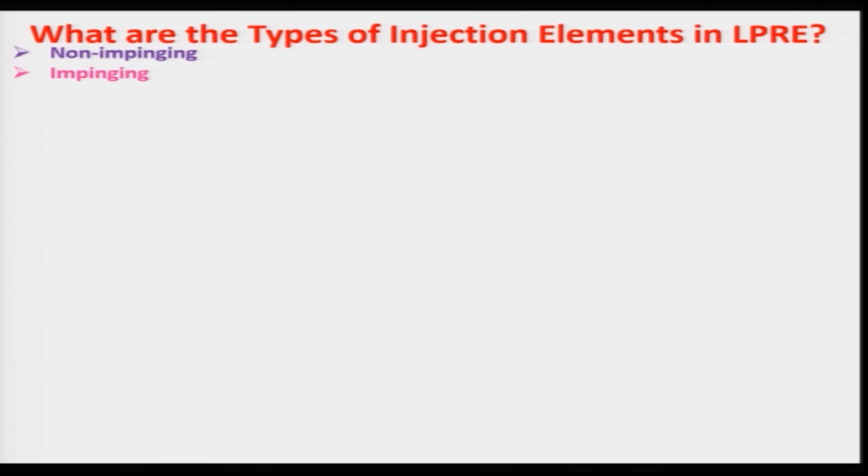Today we will be looking at various kinds of atomizers that have been developed for liquid propellant rocket engines. As I told earlier, they are basically divided into 2 categories: one is the non-impinging atomizer, the other is the impinging atomizer. Several types of atomizer have been developed and used by various researchers, but we will be discussing only some representative atomizers under these 2 categories. Let us look at some of them.

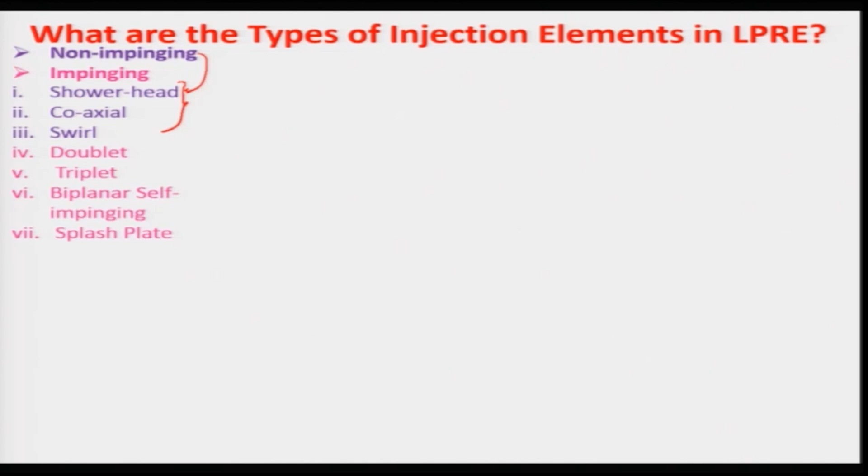The shower head, coaxial and swirl are non-impinging atomizers, and doublet, triplet, biplanar self-impinging and splash plate atomizers come under the impinging atomizers. Keep in mind that non-impinging atomizers are generally used for non-hypergolic propellants, whereas impinging atomizers can be used for either hypergolic or non-hypergolic propellants, depending on the design.

So, let us look at the shower head atomizer. In this case the orifices are shown here, and this is your fuel manifold and this is your oxidizer manifold, and it has 2 orifices or holes. The liquid jets come out of these orifices, and keep in mind that the liquid jets retain their identity for a longer length of the combustion chamber.

The shower head is similar to the shower we use every day for taking a bath. There will be straight holes or orifices placed such that straight liquid jets are produced by these shower heads, and they will not interact much in the vicinity of the shower head; rather, they will interact and the spray will be formed a little downstream, a little away from the face of the shower head atomizer.

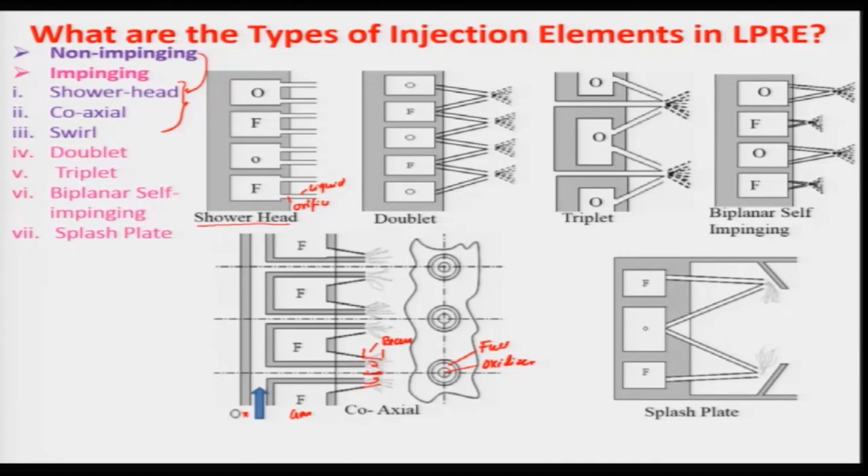However, it is a little difficult to manufacture, because this is your oxidizer and this is your fuel stream, and it should be centered properly, or coaxiality should be maintained. However, when you use this recess, a place in which the fuel and oxidizer are mixed, then the problem of common center need not be that critical.

And another thing which is being used is the swirl atomizer. This is your swirl atomizer, and in this case the tangential velocity, Vt, is imparted to the liquid such that instead of coming straight, there will be a cone over here, and this cone angle varies around maybe 70 to 120 degrees, which is very big.

As a result, the liquid cone is formed and then thins out, and then shredding will take place, and the distribution will be very good, and it will occur at a very short distance from the exit of this atomizer.

Keep in mind that the tangential velocity can be imparted in various ways. One can use a screw, one can use a tangential entry, this is your tangential entry, and a swirler can also be designed with a proper swirl angle so that it can have a very good spray. And keep in mind that the spray cone angle will be decided by the amount of swirl angle provided.

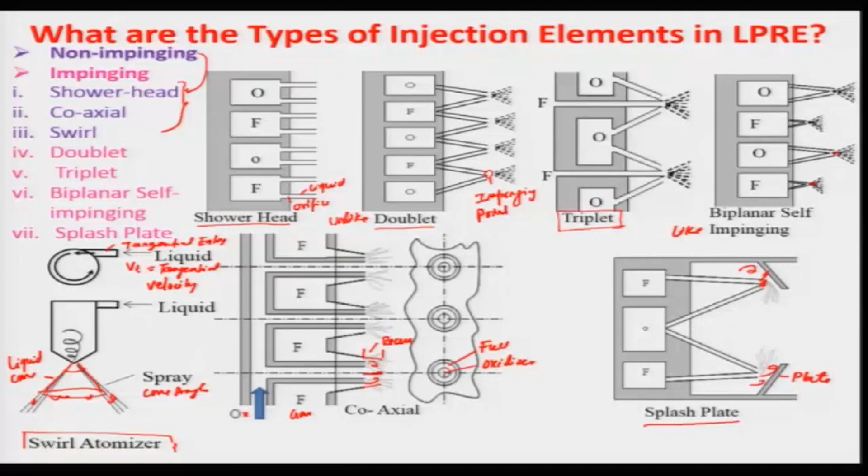So, these are the things one should keep in mind under various applications, and note that the diameter of this orifice is really very important, and also the number of orifices that will be used, we will have to see, and what the manifold size is and how it has to be designed we will see. And let us now look at how we can analyze these typical atomizers.

And let us say there is a rocket engine. In this case, the liquid is coming through; this is your oxidizer and this is the fuel. This is a coaxial injector, and we are looking at a single one, and this is your nozzle, and it will be producing some thrust because of combustion taking place here. We need to look at what the mass flow rate of this propellant is, what the fuel oxidizer ratio will be, and how we can find the diameter of the injector or the orifice.

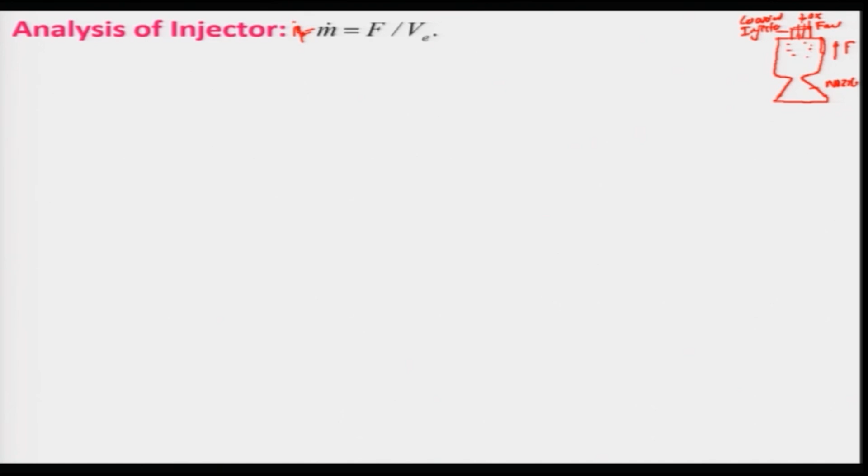So, for that we will have to look at the mass flow rate of total propellant. This is basically m dot p, total propellant, and that is nothing but F, your thrust, divided by V E, the exit velocity. And m dot is the total mass flow rate of the propellant, which consists of the mass flow rate of the fuel and mass flow rate of oxidizer.

And if I divide this by the mass flow rate of fuel, we get this term equal to 1 plus the ratio. And if I define this as the mass ratio, or we can say the mass flow ratio, then I can write m dot f is m dot divided by 1 plus MR.

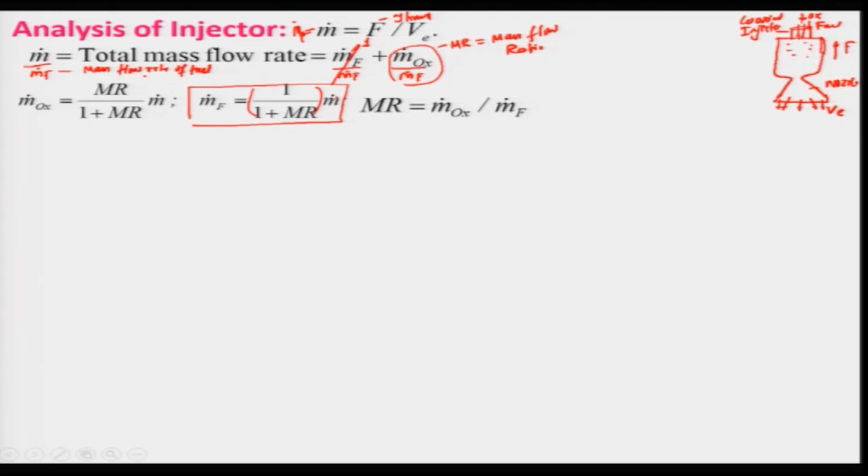So, m dot f is nothing but 1 over 1 plus MR into m dot, and similarly from this we can get m dot oxidizer, which is nothing but m dot f into MR. So, I will get m dot oxidizer equal to MR divided by 1 plus MR into m dot. So, if I know any one mass flow rate, and if I know the mass ratio or the oxidizer fuel ratio, MR, I can find the others.

I can say this is oxidizer fuel ratio, right, oxidizer fuel ratio. So, then we can really calculate what will be the mass flow rate of oxidizer and what will be the mass flow rate of the fuel.

So, by applying the Bernoulli's equation across this injector, if I consider this as an injector. So, this is your injector, let us say, and it is connected to a manifold which is having pressure P T, and this is the velocity I am getting, V. Let us say this is your oxidizer, and this is the oxidizer manifold. And the pressure which will be there, this is your static pressure.

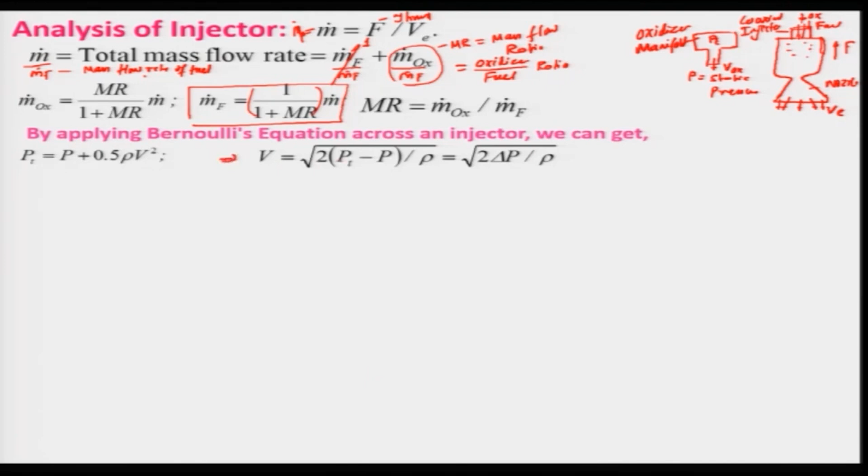So, by applying the Bernoulli's equation to this injector, I can get P T is equal to P plus half rho V square, and this rho is basically the density of the propellant; it can be oxidizer, it can be fuel, it can be anything. So, then I can write down V is equal to root over 2 (P T minus P) divided by rho, and this delta P is the pressure drop across the injector. Delta P, the pressure drop across the orifice.

And for real flow, losses like contraction, kinetic energy fractions, flow separations, etc. can occur, because this is an ideal equation, and Bernoulli assumes that there is no viscosity and no separation. But in the actual situation there might be separation, there might be certain losses due to friction, and then we can modify our equation, let us say this is equation 1, by using a factor, the discharge coefficient.

And of course, we know that Q dot, the flow rate, is nothing but A into V. So, by using that we can write down Q dot, the volumetric flow rate, is alpha divided by root over 1 plus zeta, into A I. A I is the injector's cross sectional area, it can be oxidizer, it can be fuel, into root over 2 delta P by rho, and of course, these together we call C D.

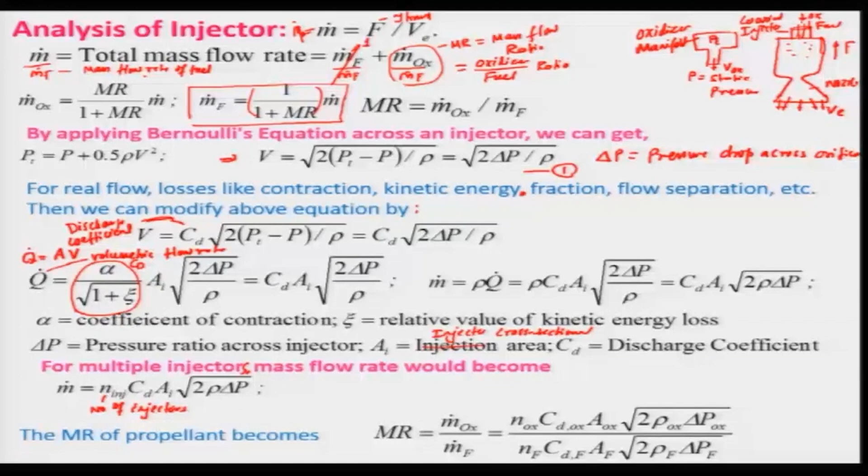So, you can just multiply it, and then by knowing this we can get M R, the oxidizer to fuel ratio: m dot oxidizer divided by m dot f is equal to n oxidizer C d oxidizer A ox divided by n f C d fuel A f, times root over 2 rho oxidizer delta P ox divided by root over 2 rho f delta P f.

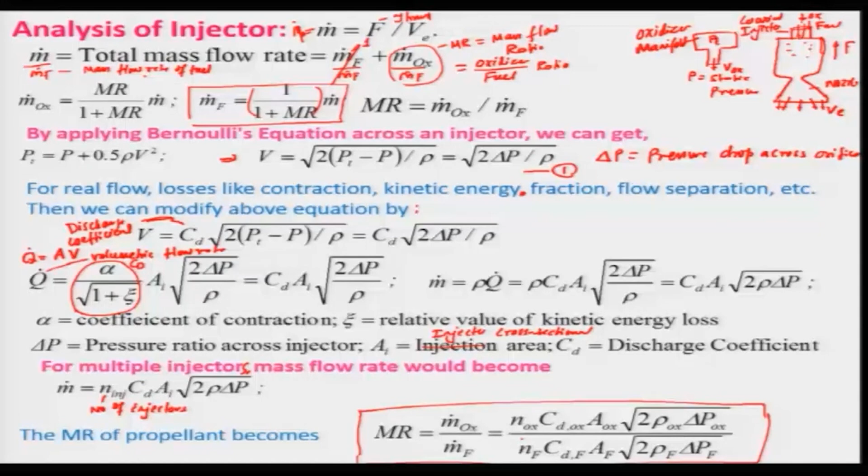So, you can see that one has to know the change in pressure across the oxidizer stream and the fuel stream, the C d of the oxidizer stream and so on, and also the area ratio. But if I know this M R, I can find it out by assuming one of them and then getting that value. We will take an example in the next lecture to see how we can calculate the diameter of the oxidizer, and with this I will stop, and thank you very much.